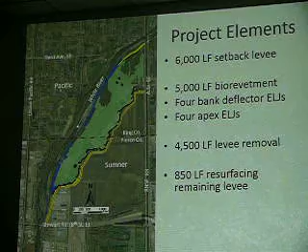So I just wanted to orient you to the two tie-ins we're going to be talking about. Next slide, please. South end: brand new, never been there before. North end: resurfacing the old levee.

In the short term, the new levee setback is going to push water up against the railroad embankment that isn't currently there. That raised a lot of red flags with the railroad when the concept was initially brought to the company, because the company traditionally doesn't allow its embankment to be used as a levee or for levee tie-ins. They're typically not engineered, designed, or built to be levees, so when somebody else ties an actual levee into it, there are safety and engineering concerns.

Again, those are the kinds of things we've been working through very collaboratively with the county on this project. Next slide, please.

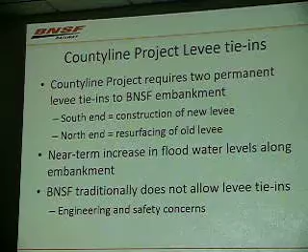So engineering and safety, again, as a result of the levee setback project, there will be flood waters pushed up against the embankment in a way that hasn't happened before. So BNSF needs to make sure that it supports the embankment to keep it safe for continued rail traffic and not undermined by the flood waters.

In terms of the long-term development needs, as you may be aware, throughout parts of the alignment, BNSF is working on adding a third main line. In a lot of areas, that's to allow more Sounder trains to run, to keep passenger trains moving while freight moves.

Because of the structure of the NRD settlement and the fact that the county is going to deed restrict all the lands within the project to make sure that they stay in a natural state in perpetuity and prohibiting all other uses, if BNSF didn't acquire the parts of the property that are going to be within the county line project, it would never be able to put the third main in. So we've worked with the county to acquire a strip of land along the west side of the embankment to protect that future development possibility.

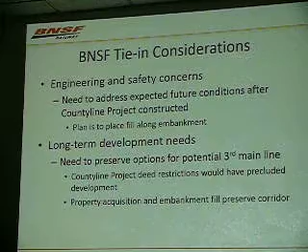So the property acquisition from the county, from a gentleman named Mosby or Mosby Farms, and the city's right-of-way will protect that future possibility and allow the actual physical fill that will protect the embankment. Next slide, please.

As Jeannie said, the county and BNSF have been working together very closely on this project. We worked for close to a year on acquiring property from the Gibsons, and by working together, we were able to acquire that voluntarily without going to trial, and that closed in May of this year.

We're also, our engineers are coordinating construction to make sure that one construction project is done before the next one begins and that they physically fit together.

And the basic construction sequencing that we're looking at is that BNSF would come in this year, if we can get permits for it, put in the fill along the embankment, and then that fill would serve as a haul road for the county. So the county could then run its trucks up along that fill to get to the north end of the project.

Without that fill road, the county would have to build a temporary road across the wetlands to build the project. And then the construction sequencing calls for the county to come in 2016, 2017 and actually build its project.

As I mentioned, the other way in which BNSF is supporting the county line project is to allow the county to use the current underpass that comes off of A Street to bring its construction vehicles in to get onto the county line project, and then use the fill as a haul road to move up and down along the embankment. Next slide.

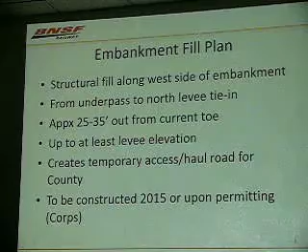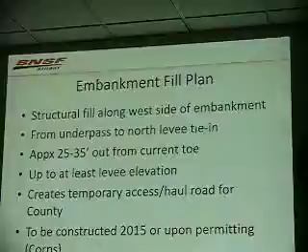The embankment fill plan, as Matt mentioned, is BNSF's current location where our track embankment exists. It does not support any type of levee situation. The ground, the structure, and everything isn't built that way, so once water backs up against it, it would start eroding that bank and fill away, creating major track damage.

As a result, going through the process, we've designed a structural fill along this, but we had to bring it out away from the embankment to create a new structural fill process. At the same time, because of what Matt said earlier, we need to protect for the possibility of a third main line in the future, though not at this point. So we're creating this fill that will be at the high water level, protecting both BNSF's track structure and creating a roadbed, while also protecting against any water that comes up against it.

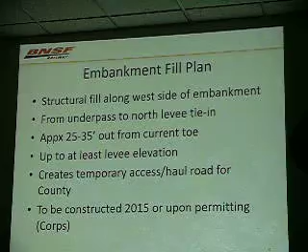That includes various forms of rocking the slopes, riprap, and so forth at various levels. And then as the county builds their portion of the wetlands, that will also help with the water flows as it comes up against the embankments.

So right now we would be building out 25 to 35 feet from our current toe, which is the bottom part of the slope, out to create this new levee area.

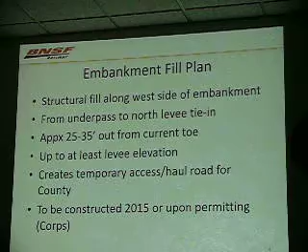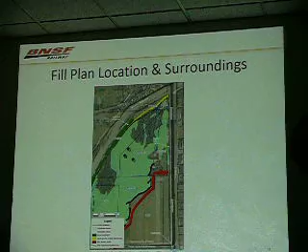On the next slide, up there where you see the yellow, that is where the new enhanced levee will be that the county will be resurfacing and structuring. All the green area down below that will be taken away, and that allows the water to come up.

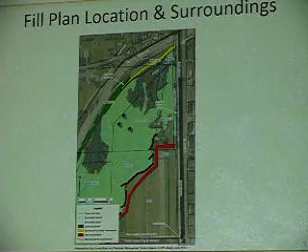The red, as discussed before, is the south end, which will all be new. All the lighter green shaded areas show what will be coming up against the current BNSF track, which we'll take care of with this levee embankment. The north end, where the yellow line is, at the very end, that's the area of the City of Pacific's property that we need to have in place to make this whole thing work.

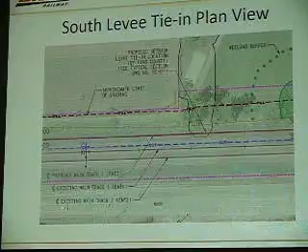Next slide. This is some of the detail. Now we're getting into a lot of the engineering side, which can get rather technical, but the pink lines are the current BNSF property that we have.

On the bottom of the page is what exists. The pink on the top of the page is what we've acquired through the Gibson and Mosby properties. The red dotted dashed line is where the fill will come out from the current slope, where you have what we call some cut lines and fills to bring up to make sure this whole thing works.

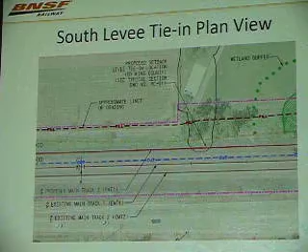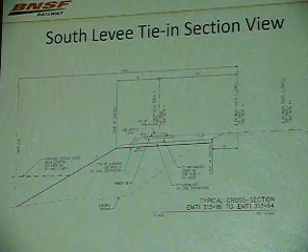That's all the south end. That level is basically 88 feet from sea level - but that's not the exact fill amount we're putting in at 88 feet. That's just showing the deviation of what's going on.

On the next slide is the north tie-in. The same thing is going to occur, showing the cuts, up to where we get to the bridge. That area is where the City of Pacific's property is located, which we need to acquire.

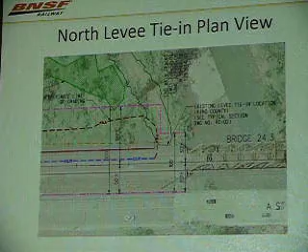The next slide shows the tie-in cross-sections, basically the same as I just explained. You can see the current existing ground slope with the dashed line and the amount of fill we have to have, and how we have to come up and tie that in to make sure it's all properly constructed with the structural fill, ensuring none of the embankment erodes away or is affected by the river as it reaches flood levels.

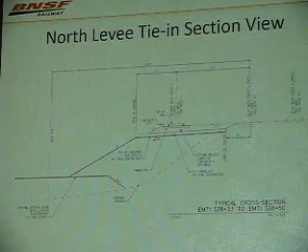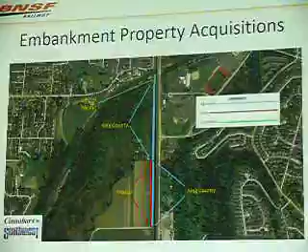The next slide starts back into some of the embankment and the property acquisition areas. If you have any questions for me on the technical side, I can answer them now, or we can wait till the end, whichever you prefer. Questions from council?

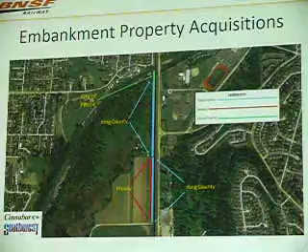The county then separated the parcel and deeded part of it to BNSF. The red is a little narrow strip from Mosby, under contract but not yet closed. What we're here to talk about today is the very north part, the little piece in green there, which is City of Pacific. Of the entire corridor from the underpass up to the river, BNSF has completed land acquisitions of everything except the City of Pacific piece on the very north end.

Chris, next slide. So this just summarizes: Gibson's closed, completed, Mosby's under contract.

City of Pacific is a 30-foot wide strip of right-of-way. It starts at the river, so for our purposes it comes from the north levee down about 300 feet. The reason we need it is because both BNSF fill needs to be placed there and because the county levee needs to come on top of it. So it's where the new fill and the county levee come together, within the City of Pacific right-of-way.

The reason we are here is we would like to work with the city to go through the acquisition process, which I believe would be through a right-of-way vacation process as provided in the city's ordinance and state law. We've been working with staff, and they suggested that we make this presentation to council tonight so we can continue the process of working on vacation.

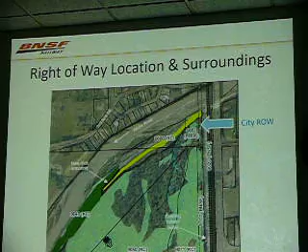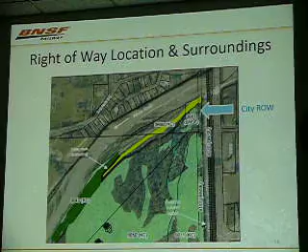Next slide. This zooms in to show you a little more closely. The BNSF existing right-of-way is on the right-hand side, running along A Street. BNSF has acquired the property coming up from the south there, which is what we just acquired from the county, that's parcel 9107. BNSF has historically owned the parcel on the north levee, 0661. The City right-of-way, marked with the blue arrow, is surrounded on three sides by existing BNSF ownership, and that's the piece we really want to talk to you about acquiring.

Next slide. As I said, it's 30 feet wide, about 315 feet long. It's currently just wooded, undeveloped, and unused. It's adjacent to the main line and embankment. BN owns everything around it except the riverside. There's no existing public access to the property because it's surrounded on all sides by private property from which there's no access.

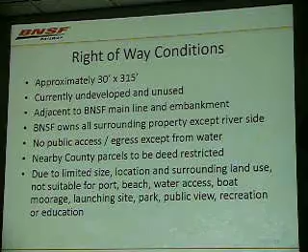And the county parcels one step removed, as Jeannie mentioned, are all going to be deed restricted to require those properties to remain in natural condition forever, preventing any other uses. Because of the limited size, location, and surroundings of that little piece of right-of-way, it's BNSF's opinion that it wouldn't be suitable for a number of purposes stated in state law whenever a city is going to vacate a piece of right-of-way with a shoreline. This is something we would work with the city to evaluate, but in BNSF's opinion it would not be suitable for any of those things based on size and location.

Next slide. BNSF believes there would be some value to the city in vacating the right-of-way, not least because it's the last piece necessary to support the county line project construction. As Jeannie mentioned, there's substantial benefit to the city in having that county line setback project constructed in terms of flood control. BNSF would, of course, provide compensation and pay for all the fees and costs required under the city's ordinance and state law.

Next slide. So what we would like is to be able to work with city staff to prepare the proper petition and application materials and tee up the required evaluations and process for the city to evaluate the petition for vacation of the right-of-way and hopefully approve it. So that is the presentation we had for you tonight, and Ms. Glenn would be happy to answer any questions.

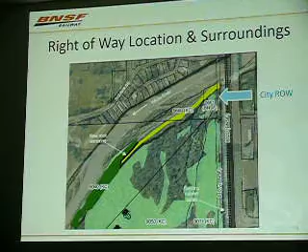Councilor Button, just to further clarify, this is where if you had gone up just a little bit further, Skinner comes down and turns, and you've got that barricaded old road end that runs down into the river there on the west bank. And there's one old footing sitting out there.

I think ages ago there used to be some sort of low pass bridge there, decades and decades ago. We drove it the other day after we were down here talking, and that sounds right, but I think you know the neighborhood a lot better than I do. I know there's been talk over the years about having another trail bridge across the White River, potentially at that location, but I don't know what's in the current park plan.

Pedestrian bridge? Yeah, so that kids wouldn't walk on the railroad bridge. Not that they would ever do that now.

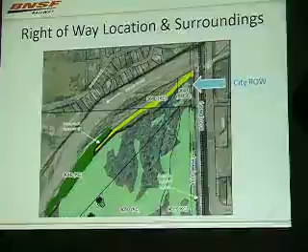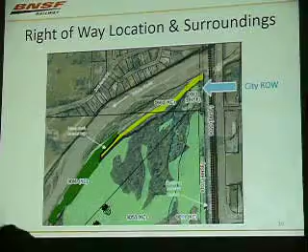If you look on a current aerial, where they go now is they get through the wire, walk across here, and take this little pedestrian path. It's not supposed to be there, but it is. Which I'm sure you'd be just as happy to get rid of.

Unauthorized pedestrian crossing right next to it. Tragically, when we did the site visit, there were signs on the fence of kids who were killed on the tracks. So the railroad does not want people on its tracks, and does not want to invite people close to them.

Other questions from council? Okay. So for staff, what's the process for us?

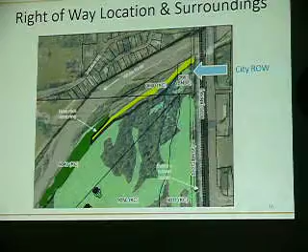Gary, representing Burlington Northern Santa Fe, as Matt said, this was information we wanted to bring to you as council, first getting an update on the left bank, or east bank, project, as well as all the moving pieces going into this very complicated and worthwhile project.

So the next steps: now that you've heard the presentation and have a sense of the complexity and timeline involved, the Public Works Committee will dig into this information a little further on June 3rd. And as Matt alluded to, the vacation is a very important component of this project.

We're certainly aware of some of the desires the community has discussed and the different ideas that have been looked at over the years. So we're going to talk about what that means and also look at the process of vacation. There's a prescribed process within code and state statute.